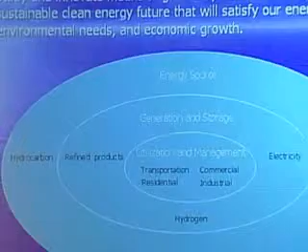The mission is to study and innovate means to generate, use, and manage a sustainable, clean energy future that will satisfy all our energy demand, preserve our environment, and allow economic growth. All aspects of energy, starting with selection of the energy source, to the way we generate, store, distribute, and consume it, can have a profound impact on the local, regional, and global environment and economy.

I'm sure we'll hear more about all these areas during the panel discussion. So I'm going to start with what we at Boston University have a clear advantage in terms of clean energy research and education. The College of Engineering, the School of Management, and the College of Arts and Sciences all have clean energy research and education being conducted in their programs.

These are synergistic and complementary in nature. This allows us to engage in much larger and more meaningful research collaboration that not only addresses new technologies, but how to market the technology and also assess its societal impact. It also provides students in each program the opportunity to learn from the other programs and get a much broader and more complete education in this important area, which is key to influencing the future generation.

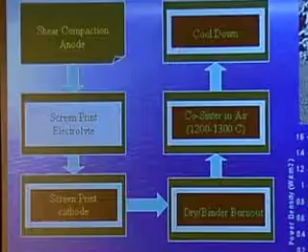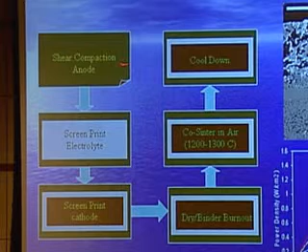We have come up with a manufacturing process that involves one sintering step to manufacture the solid oxide fuel cell. We are doing this with our industrial collaborator, BTU International, and Don is sitting in the audience. We have used this process to make high performance solid oxide fuel cells in a very cost-effective way.

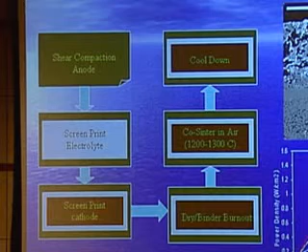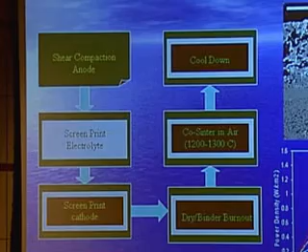Here is the microstructure and the performance of the cells. If this process can be successfully scaled up, it will allow us to bring down the cost of manufacturing solid oxide fuel cell stacks by an order of magnitude and help the solid oxide fuel cell achieve commercial realization.

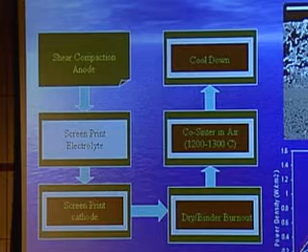In the area of membrane technology, we have developed an oxygen ion and electron conducting membrane that can be used in a membrane reactor. Steam is fed on one side of the reactor and fuel on the other side. The oxygen from the steam is extracted by the membrane and used to oxidize the fuel on the other side.

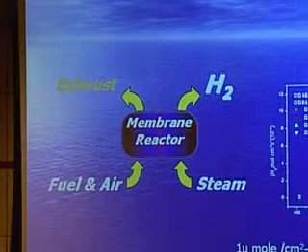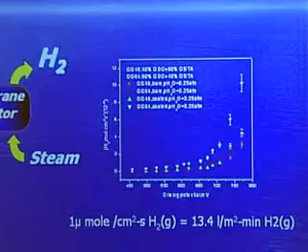So the end product is hydrogen - the steam gets converted to hydrogen, and the fuel is oxidized. We have used these membranes developed in our lab, and we've been able to get a flux on the order of 13.4 liters per meter square per minute of hydrogen. This rate is sufficient to power small, low temperature fuel cell systems based on polymer electrolyte fuel cells, where having ultra pure hydrogen is the major challenge. This technology will enable us to do that.

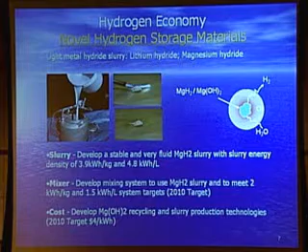In the area of enabling the hydrogen economy, we are working with Safe Hydrogen on using light metal hydrides as hydrogen storage media. So what we do, essentially to release the hydrogen, is react the hydride with water, and hydrogen is released. The objective of this program is to come up with a system that has the right gravimetric and volumetric energy density required by the transportation industry.

At the same time, we aim to come up with a recycling technology for the byproduct, to meet a cost target of $4 per kilowatt hour by 2010, and $2 per kilowatt hour by 2015.

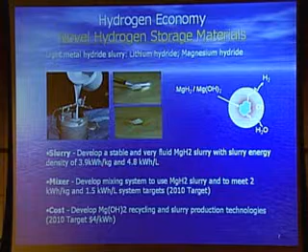So in the area of green processing, we have developed a process where we use a solid oxide fuel cell to electrochemically split the metal oxide and generate the metal, with byproduct oxygen gas. We use this to synthesize and produce energy-intensive metals like magnesium, titanium, and tantalum, and so on.

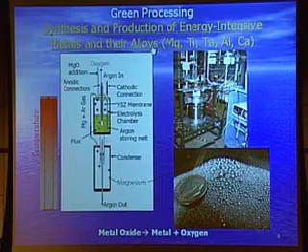In this process, the energy consumption is 10 kilowatt hours per kilogram of magnesium. And if successful, if we can scale it up, the estimated cost is 30 to 40 cents a pound of magnesium, which is 50% of the cost at which magnesium is produced today.

In the area of bioenergy, we've heard about waste-to-energy conversion from Scott. Here we have a similar process that allows us to convert biomass or waste to energy, and the way we do that is again using membrane technology. We feed steam and biomass, and we employ some electrical energy. The steam is split, and the oxygen from the steam is transported through a membrane to oxidize the biomass.

On the steam side, we end up with pure hydrogen, and on the biomass side, we oxidize the biomass and end up with syngas. Both the hydrogen and the syngas can be used for fuel cell applications.

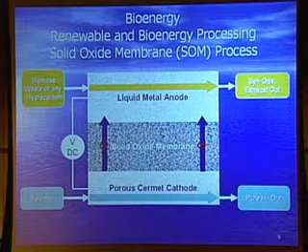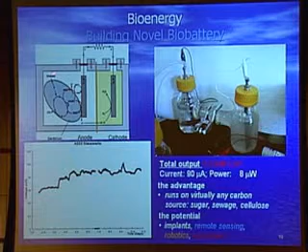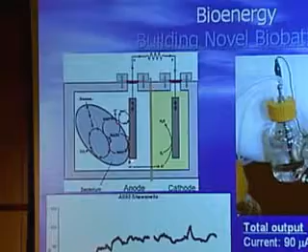Another area of bioenergy is building novel batteries. Here is a conceptual representation of the process - we use microbes as a catalyst to oxidize the biomass at the anode and generate hydrogen, which then migrates to the cathode and is oxidized to water. Here you can see the laboratory scale setup.

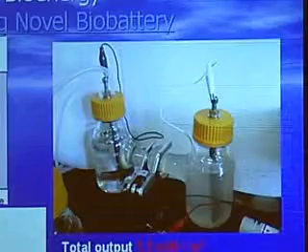This is the performance plot that shows the long-term stability of such cells. Here are some performance figures - it can use any type of carbon-containing source, and potential applications could be bioimplants, remote sensing, robotics, and, well, it can also be used to generate power from you know what.

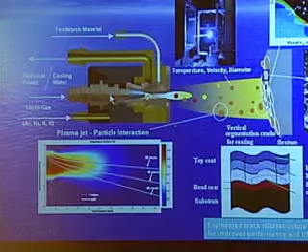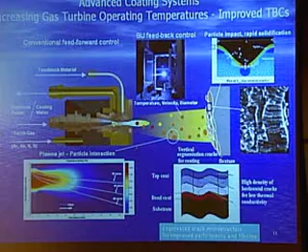Another area we are working on is advanced coating systems, and another way to impact clean energy is by increasing the processing temperature of the power generation technology. If we can employ gas turbines at higher operating temperatures, we can improve the process efficiency as per the second law of thermodynamics.

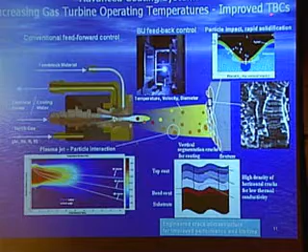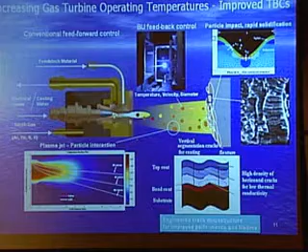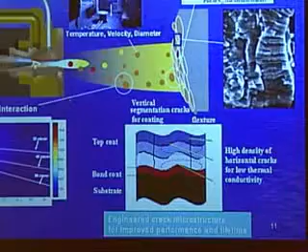This we can do by applying improved thermal barrier coatings. We have developed a real-time feedback control strategy for plasma deposition of thermal barrier coatings, and we control the variables in the plume to engineer the cracks in the coating in order to improve the lifetime and the performance.

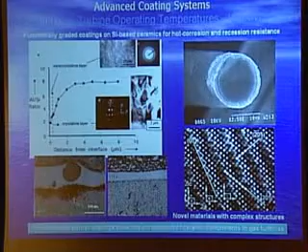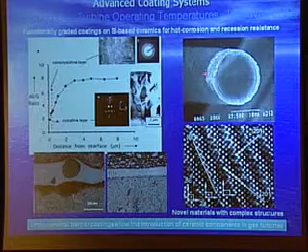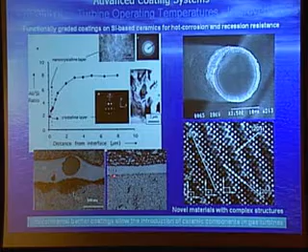As we increase the operating temperature of the gas turbine, the turbines also become susceptible to environmental corrosion, so we are also developing environmental barrier coatings. In this slide, you can see such a coating, which is a functionally graded mullite deposited on a silicon carbide substrate. When the coating is not present, the surface gets attacked by the environment, in this case slag, and you can see the formation of pits. By having even 1 to 2 microns of the coating, you can see that the substrate is adequately protected.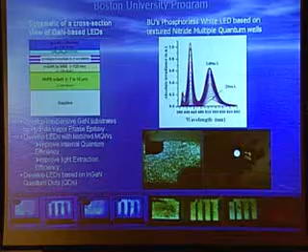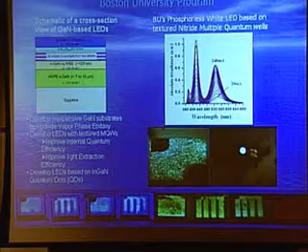We also have an ongoing program at Boston University on energy efficient solid-state lighting involving LEDs. As you know, solid-state lighting involving LEDs has significant potential in terms of improving the conversion efficiency of electrical energy to optical energy, producing white light. It's possible to get efficiencies on the order of 50%.

With 50% efficiency in solid state lighting, you can get energy efficiencies which are 2 times more than fluorescent lamps and 10 times more than incandescent lamps. The research activity at Boston University is directed at developing gallium nitride-based LEDs with the capability of very high photon conversion and extraction efficiencies.

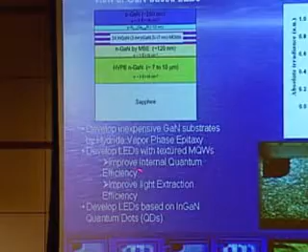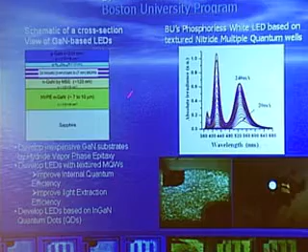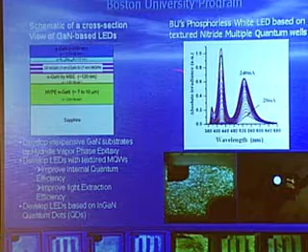The research is also directed at bringing down the manufacturing cost of these LEDs. One way is to develop an inexpensive gallium nitride substrate by hydride vapor phase epitaxy instead of the more expensive MOCVD route. Here is a spectrum of BU's phosphor-less white LED based on textured nitride multiple quantum wells.

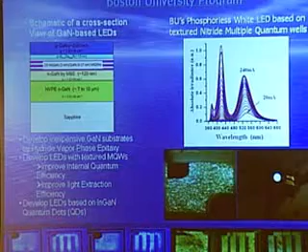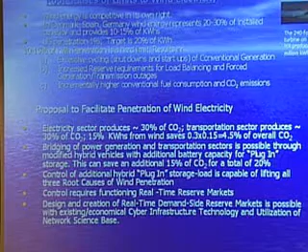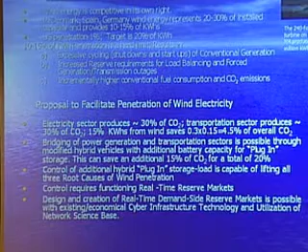As you heard this morning from Professor Caramanis, we are also employing systems theory and network science to facilitate the penetration of renewable technologies like wind to electricity. This is done by combining and optimizing various means to overcome the limits or market barriers to entry. I'm not going to talk much on this anymore because you heard about this in the morning.

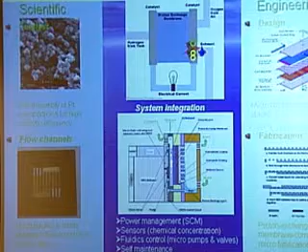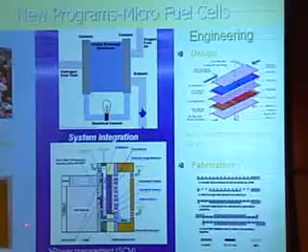We are also in the process of starting a few new programs. In this slide, we are starting a program which involves design, fabrication, and systems integration of microfuel cells, using our expertise in the area of MEMS fabrication and fuel cell technology to develop this program.

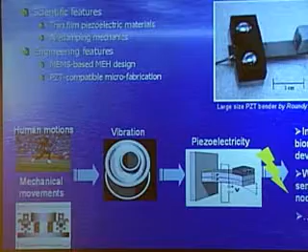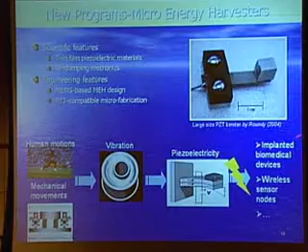We are also working on micro energy harvesting devices based on piezoelectric material, which converts mechanical energy into electrical energy, and it can be used to power biomedical implants and wireless sensors.

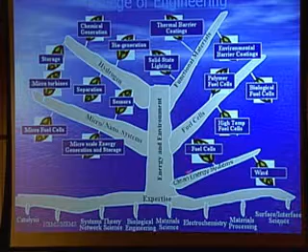In short, what we have is a set of core expertise, and we use this core expertise to branch out into different areas of clean energy. With this, I'll ask Nalin to tell us more about the School of Management.

Thanks, Uday. Unfortunately, I don't have as many pretty pictures or animations to use, so let me show you the pictures that I have. I'm using an excuse to come up with something.

The basic premise of most of what the management school's research hinges on is the fact that the choke point for adoption is not innovation in technologies, but rather impediments to adoption. Some could be regulatory, some could be organizational structures. But in particular, a couple of themes of research we are working on recognize that the greatest impediment to adoption is in fact the existing capital stock that we deploy—the houses we use, the way our communities are designed, the infrastructure we have built, and so on.

This is to motivate you even more to say that this is not a new problem for mankind. We've dealt with this with all kinds of other technologies and ecosystems built around it that involve hardware components, software components, skills, and behavior patterns that we have all built around. So it takes a lot of time from the introduction of an idea to its maturity. In order for that to happen, what we're trying to bring about is a way for adoption to get to a point where systems could be tipped.

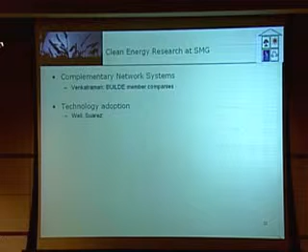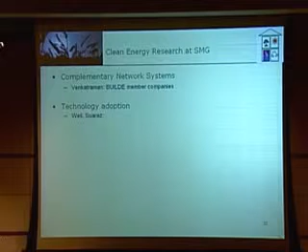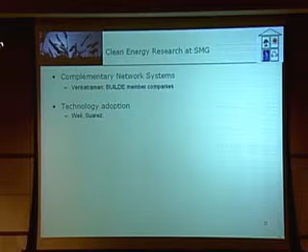I'm going to give you a brief survey of some of the work that's going on, not necessarily at the moment in the energy sector, but we've gleaned a lot of tools and instruments and expertise in other sectors that we are beginning to bring to bear in the clean energy sector. One of which is the study of complementary network systems, led by Professor Venkatraman in the School of Management under the research institute called BUILDE with a large number of member companies. We've been looking at the adoption of a number of information technologies.

A particular tool that he's used - I'm going to use one set of examples he's developed looking at the video game industry to see how the game consoles and the various content, the various games built around it, have evolved over time. What his studies have done is come up with a mapping tool that allows us to visualize the landscape of how this ecosystem evolves around companies.

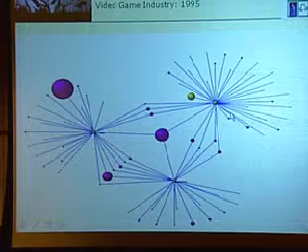That's led to a number of studies, one of which has been to understand the economics of what makes a company, what makes a strategy work for one of these hubs - in this case Nintendo and Game Boy, Xbox - to switch from one standard to another. So there's a few more of these pretty pictures. An interesting point he's made in this last one is that it doesn't have to be necessarily the standard around the hardware that makes it switch, but it could be the kinds of games you use on these standards that would make it switch.

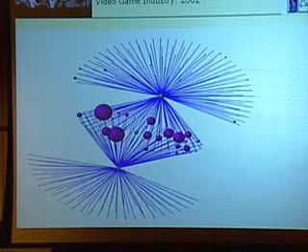There are some interesting general lessons that we might be able to glean from these studies which could be applicable to the energy sector. For instance, it doesn't have to be the energy generation or the distribution or the storage, but it could begin from the energy use devices or the organizations that are built around it.

A second set of work drills deeper at how users respond to new technologies. There's a number of studies done on that, and the one I'm going to focus on is led by John Henderson, part of a study called the Connected Home Project. Under this project, we have a number of industry partners, one of whom is already here - it's from Actus Lendlease, who you'll hear from in just a few minutes.

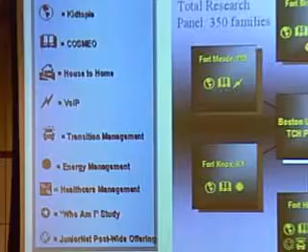This study involves 2,000 or 3,000 houses in a number of Army bases around the country, which have been connected with modern communications technology. It's been used as a living laboratory to understand how end users, in this case families, respond to these new technologies. Here are the 6 bases in which the homes and the technologies have been deployed. We have studies that involve education, healthcare, communication, and more recently now in energy management.

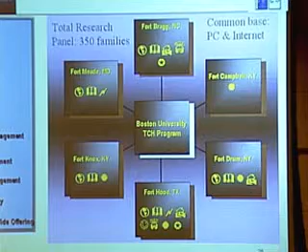For instance, if you install a particular kind of heating system or a cooling system or an appliance, in order to estimate the benefits from it - the energy savings, for instance - would require a good understanding of how the end user really deploys it. This is an experimental platform that allows us to study that.

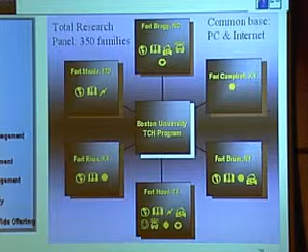R&D investment models - that's a project looking at investments into early stage technologies and how different organizational structures would impact the way R&D decisions are made, from startup firms all the way into national laboratories which have national interest at heart, to larger companies with research divisions. So how that organizational structure impacts the R&D investment decision.

We have people from our marketing department and organizational behavior looking at the notion of corporate social responsibility. Some of you probably have heard a lot about the research going on here.

There's a sense about trying to understand whether doing good and doing well are related to one another, and there are studies on that. We have a number of projects in the finance group.

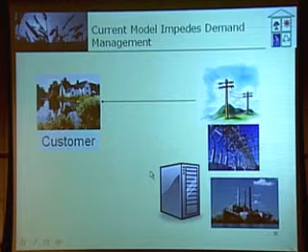But if you take it to the next level, which is one we might see in some places, there are these energy service companies who step in the middle between the utilities and the customers, who might begin to manage the various risks the customer or utility was facing before. By pooling across customers, these risks would be transferred and managed better.

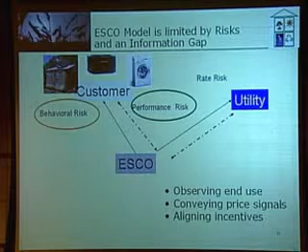So the idea is, can we think of a new organizational structure, a new entity, a new player who could parcel the risk out to different people better? Here's a concrete version of the idea.

This also applies to the demand side story Mike Caramanis mentioned at the end of the morning: if you have an intermediary that provides energy services to a pool of customers, the energy services and energy saving or conservation technologies would have their initial investment funded by an outside lender, and the servicing of these loans would be carried out by the savings that accrue over time.

But those savings need to be measured, monitored, and verified independently. This creates a role for the cyber infrastructure Mike was alluding to—somebody needs to measure and monitor this and almost create a currency around which contracts could be written.

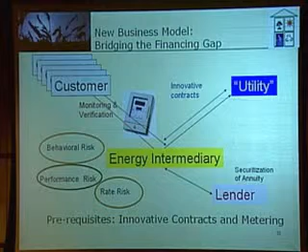And this, we think, is a new potential business model that could emerge. Just as a closing point, this isn't really something new—I'd argue something like this has been happening in the information services outsourcing problem. Large companies gave rise to a new set of intermediaries that emerged originally as system integrators and subsequently as outsourcing companies that do something like this.

Just as a quick sum up, here's a list of things, and this is once again going to be on our websites for you to look at. What I want to do next is turn it back to Uday to talk about how we plan to wrap all of this research happening around the university in the form of a research center. Uday would say a few words.

As it is evident, we found out that we have a large number of activities going on in the university in the area of clean energy, and it involves three colleges—the College of Engineering, the School of Management, and the College of Arts and Sciences.

So we are proposing to create a clean energy center. The idea is with the large number of faculty and students involved in research in this area, we will be able to use the center as a springboard to launch highly visible research programs that will lead to marketing of next generation technologies. We can also use the center to disseminate knowledge in this area.